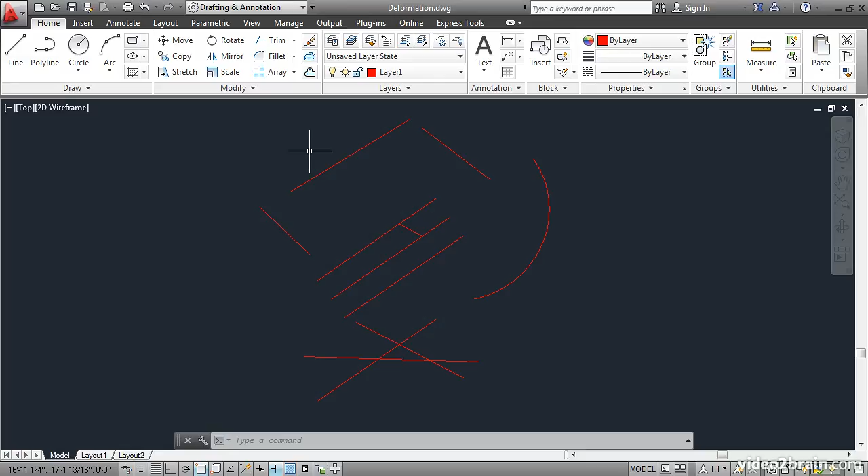There's a more efficient way of using trim, and I'll show you this shortcut. Click Trim, and this time, instead of explicitly selecting trimming edges in this first phase, let's skip over that by using the default option, Select All. All you have to do to execute that option in the angled brackets is press Enter. So just press Enter, and you move on right away to the second phase.

Now all the objects in the drawing are potential trimming edges. So I can go ahead and click on objects to trim them. The part that I click is the part that gets deleted. I'll press Enter to end the command.

Extend is like the sister command to trim, and it's located on the same flyout. And it likewise is divided into two phases. So instead of individually selecting boundary edges for extend, let's use the shortcut Select All. Press Enter, and now everything in the drawing is a boundary for everything else. So I can go ahead and click on an object to extend it where it touches another one. I'll click here, and it gets extended.

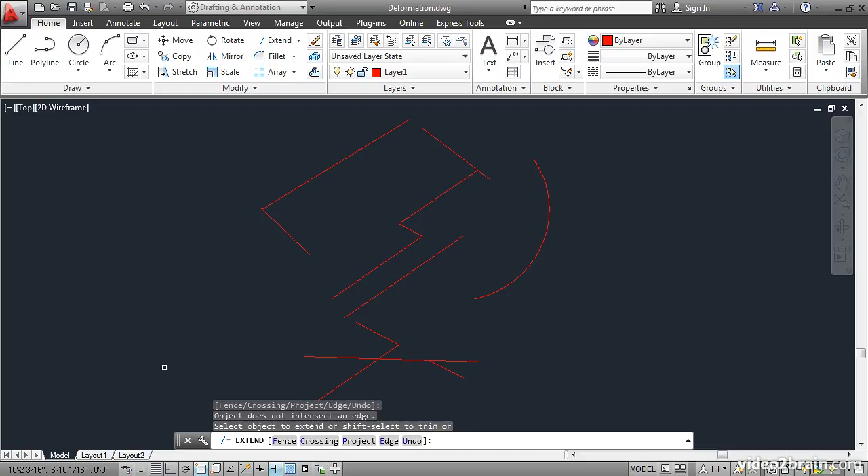I'll click here, and nothing happens because this projected out doesn't hit anything. But if I go ahead and extend this line, I could then extend this one to meet it. You can also extend arcs. I'll click here, and it's extended to the next edge. If I click the arc on the other side, it gets extended all the way around to the first boundary that it encounters.

Another interesting feature of both trim and extend is if you hold down the Shift key, the command inverts to be the opposite command. So I'm going to hold down the Shift key, and I'll go ahead and trim objects by clicking on them. You see? I'm actually trimming within the extend command. I'll press Enter to end the command.

Now let's go back to trim. I'll press Enter to select all edges, and then I'll trim something right here. I'll hold down Shift, and then extend something. So in this way, the two commands are interchangeable. You can trim and extend all from one command. I'll press Enter to end.

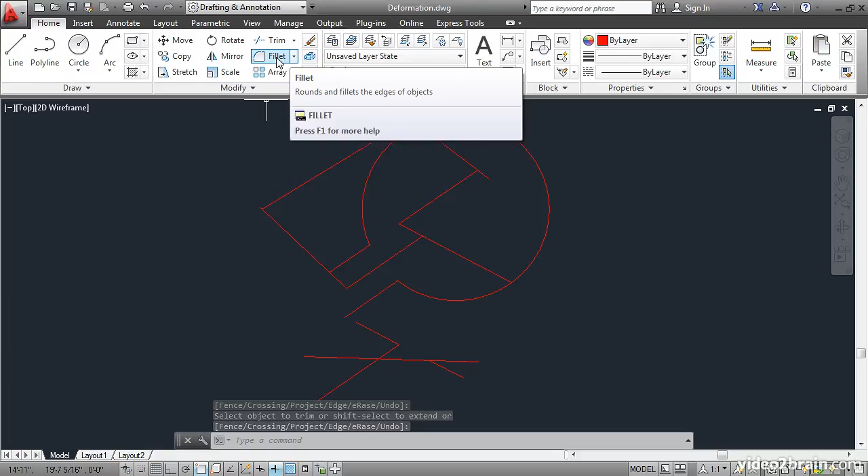Next, let's take a look at fillet and chamfer. Fillet first. Click the fillet tool, and the way that this works is it puts an arc between two selected objects, and the size of the arc depends upon the radius value that you set. Click the radius option, and then type in a value.

Now I'm not too sure about the scale of this drawing, so I'll set the radius interactively by clicking 2 points. I'll click here and here to set a radius value. Then I'll go ahead and click two objects, and they're joined with an arc that has the radius that I specified. I'll press the spacebar and fillet two other objects together. How about this one and this one?

They have to be extended in order to meet in that curve. If you try to fillet parallel lines, this is what happens. They will be joined with an arc. Note that this arc doesn't have the fillet radius, however. Its size is determined by the distance between the parallel lines.

The fillet command is also used with a 0 radius to join objects in a corner without making an arc at all. Let's try that. Fillet, radius, 0, enter. Then I'll go ahead and click two objects, like these two, to join them in a perfect corner. Let's try that again. Press Enter to repeat the command, and then click two objects to join them in a corner.

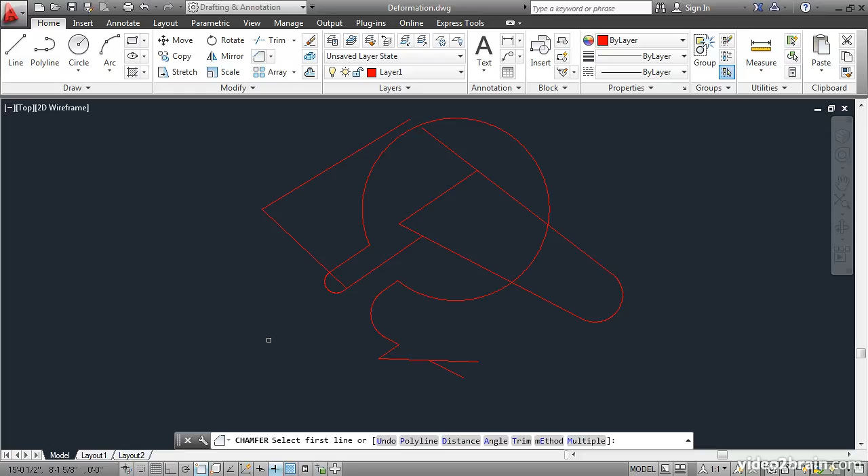Chamfer works very similarly to fillet, and it's on the same flyout. Instead of putting an arc in between two lines, it puts a beveled line, and the size of this bevel is controlled by two distance values. Click the distance option, and then either type in a numerical distance or specify one by clicking 2 points.

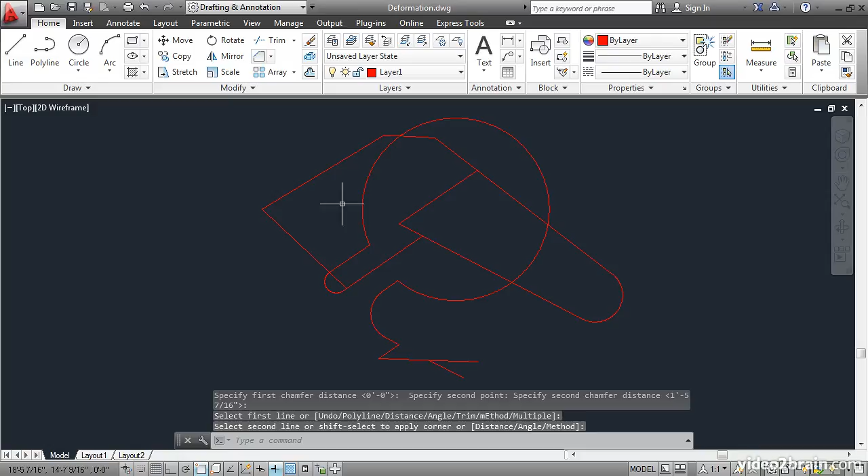I'll press Enter to move on to the next prompt, and then I'll go ahead and chamfer two lines together, and it creates this bevel. I can do that again. I'll press Enter, and I'll chamfer these two lines together, and again they're created with an additional line segment between them.

Let's take a look at the stretch command. This is an unusual command because the way that you select objects is unique. You have to select objects using a crossing window. So if I wanted to stretch this arc and these two lines, I'd have to go down here, click a point, and create a crossing window. Press Enter to get out of Select Objects mode, and then specify an arbitrary base point.

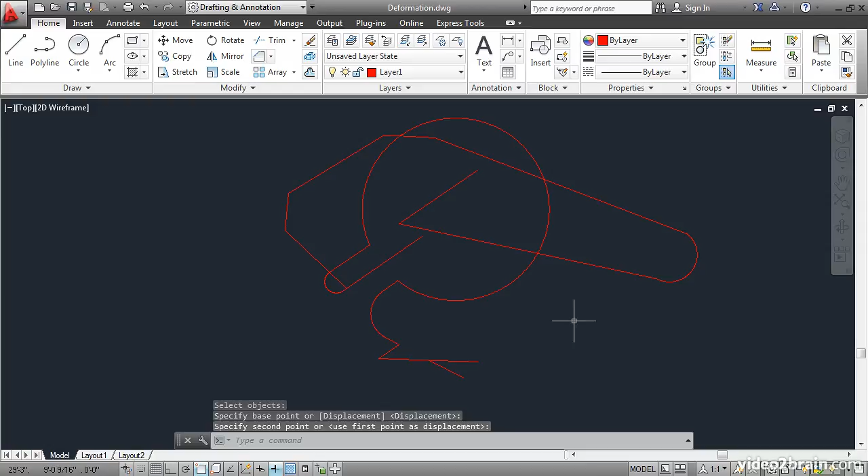Move the cursor and you'll see that you're stretching those objects. I'm changing the shape of the objects because I've picked them up essentially from their selected endpoints. I'll click again to end the stretch command. Let's try that again. Stretch. I'll click here and create a crossing window. Press Enter, click a base point, move the mouse, and click again.

Lengthen can be used to elongate lines and arcs, but it doesn't change their orientation like stretch does. You can find lengthen by using the Modify slide out, and it's right here. Lengthen. Let's lengthen some objects using a percent value. I'll click the percent option, and I'll type in 150 for 150%. Press Enter, and then click on an object. I'll click right here, and the object is lengthened 150%.

It depends on which side you click. If I click over here, the object will be lengthened that way. If I click on this arc, it will be lengthened on this side 150%. Lengthen is preferred if you want to be sure that you don't change the orientation of an object. I can just make this longer and it stays at the same angle, whereas stretch will change the angle and the length at the same time.

In summary, you have learned how to deform objects using a series of specialized commands. It's a good idea to practice using these tools on your own so that you develop your intuition about choosing the right tool for the job.